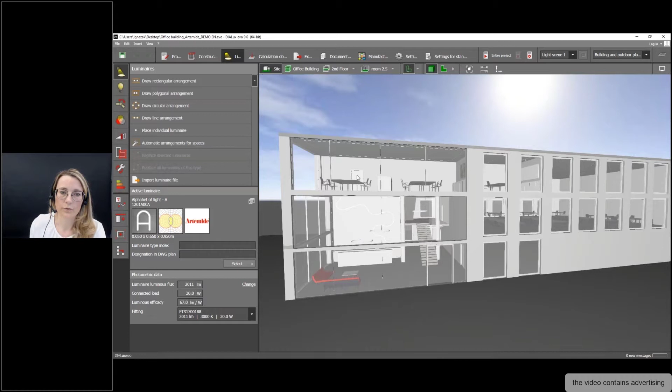Okay good, let's go forward. I will introduce you to the project. Here we have an office building, and I will go to the second story in this part with the office. The foyer is also created here with some luminaires from Artemide that I'll show you a little later. I will go first into this office, since we need some luminaires here, I will show it in that case.

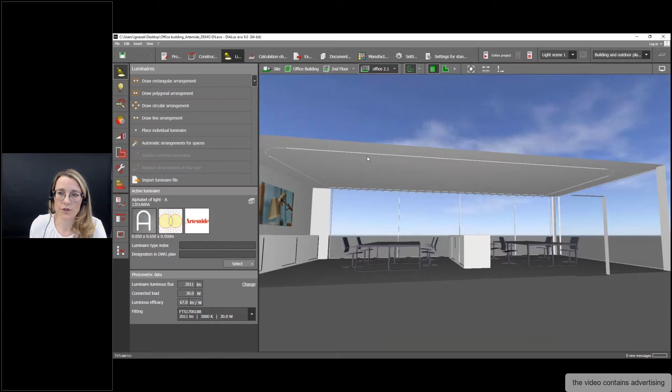I have prepared this room with the track system, from Artemide's A.24 system. You can use it recessed, surface mounted, or pendant. I have decided here to work with the recessed version, and in the corner I used this profile as well. I can also add this light distribution curve to highlight the corners of the room. I think it's very interesting, and another special solution here is that we don't have the rectangle form. The other parts of this track are built from objects, because I have the recessed version.

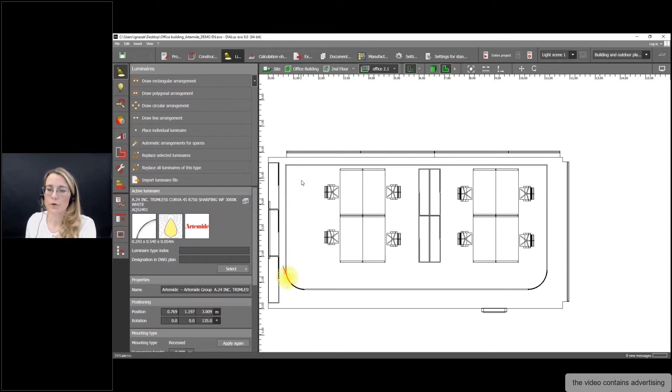For the planning, so that I can import the line arrangement, I should use the import function. I will go directly to the homepage from Artemide. You can search here on the right, but I like to go down to architectural indoor and search for the product directly. We have the different pictures and the A.24 system, so you see here the different solutions.

The magnetic track also uses spots for flexible positioning. Then we have the diffused option and the sharping, so direct lighting, also some standalone versions. I want to have the diffused optic, so I click on that.

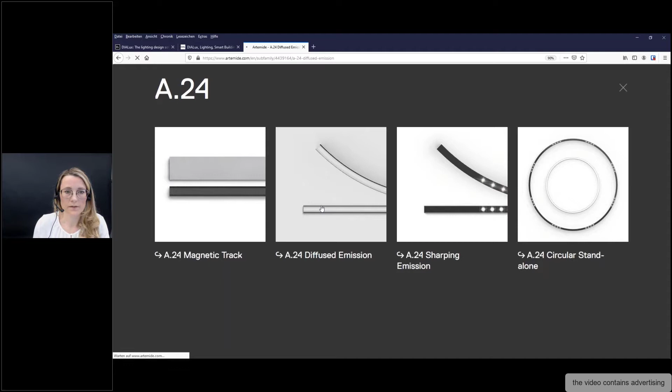It needs a second. So yeah, here it is. You can see here also an example of line arrangement. In this big office, I go down.

I want to have a white system, white color, recessed. And I need the length of 1.17 meters because that is perfect for my office, in the correlated color temperature of 3000 Kelvin. Then I get here my product, so I have only one.

You can, if you like, download the data sheet. You can get a zip file with all information about the products, or mark it as a favorite. When you are registered, you can have a list there. I click on the code, get more information to check it in, and then we can go here to the ULD file.

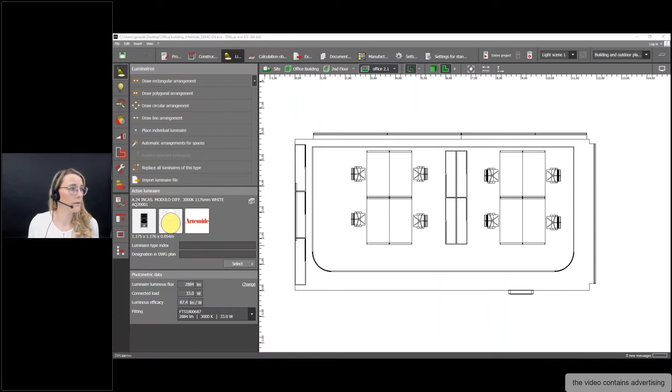That's perfect to use an ULD file because it's more representative. So I go to open, and then it should be in my project. I will move it to the other side. So you find here the active luminaire.

That's my import. I have this length of 1.17 meters, which you find also here down under the picture. And to go forward, I would like to use the new line arrangement.

So when I click on line arrangement, you see that the mouse is active, and you have a little line here next to the arrow. When I go here to the left, down under this active window, you find more information about the arrangements.

The first part is the possibility to use the line arrangement according to the quantity, and the other one is according to distance. In my case, I want to have here over the tables and over the shelf a line arrangement.

I don't know how many luminaires I need here between these tracks, so I use in the first step the according to the distance option. Then you find the information that you can write in a distance per meter, or that's new here, per luminaire length. When I have the mouse over, you get the luminaire length of 1.17 meters.

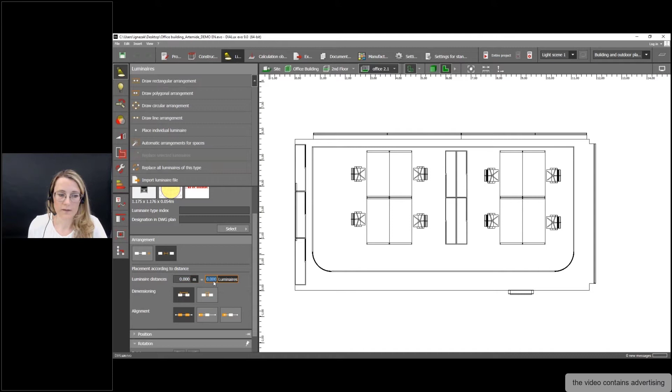At the moment I have zero luminaire length, but I can type in, for example, 1, and you see on the left side automatically the 1.17 meters of this length distance. Or you can say 1.5, and it's automatically calculated by DIALux evo.

I want to have 0 luminaire distance, and then it is interesting how it should be measured here, from the middle to the middle point of the luminaire, or edge to edge. In my case, I want to have here the dimensioning edge to edge.

And now you see we have minus, so I have to write in once again 0. And we have also the different alignments, so you can use the mouse over to see it centered in the line.

The first object should start with the start point or the central point here. So the center of the first luminaire should be here on the start point. In my case, I often use the second one, for the edge here on the start point.

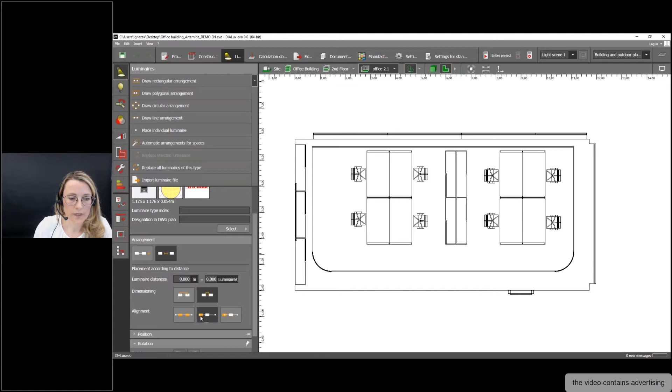Then I can go in my project and create the first point, the start point. You see also what is new, that when the line is like an arrow, you have a start point and at the end point an arrow, so you see the direction where you are going. You can move the line and get a preview of the pieces, or the quantity of the luminaires.

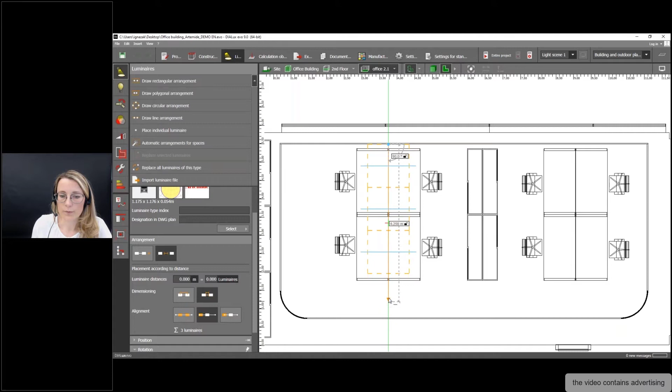This orange line is a surrounding of the light distribution curve, called the bounding box. You see in that case, when I draw this line, I get 4 luminaires, and when it is a little bit shorter, only 3. So you see here the preview.

Then I can click the second point, the end point, and the line is fixed. Automatically the line becomes active, and that's also new. You find it here on the right: Edit line. This function was given before, but it is now automatically active, and I don't have to click on move to move the line.

So I can go directly here on the line. You find my axis, and then I can move my line to the best position directly. Click to the right, then it is marked, and when I click once again, it is automatically in the function for moving the line.

You can also click the end or start point to move the line or make it longer, something like that. You find also the measure dimension line here, the length of the line, and at the moment it is 4.73 meters. It's also here the information for you in this part.

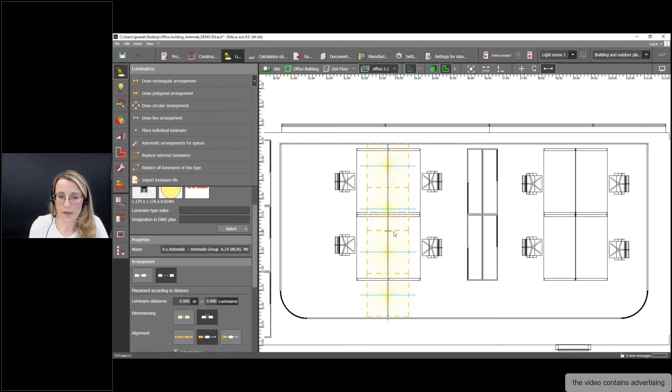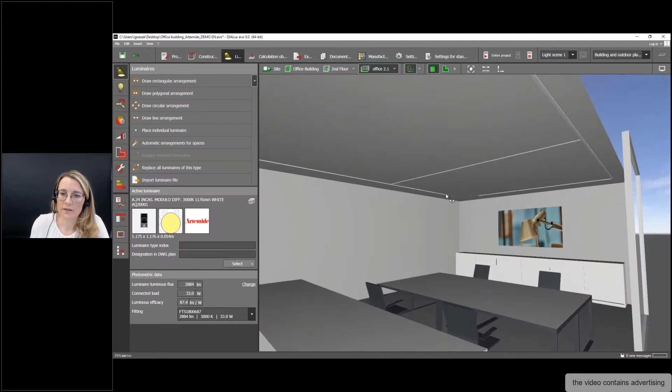Also interesting is the 3D view. I tell my participants in the seminars that they should have a look at the ceiling here in the 3D view. Is the line or the luminaire really recessed in the ceiling? Sometimes it can be that it's not perfectly placed, but here in that case it's okay.

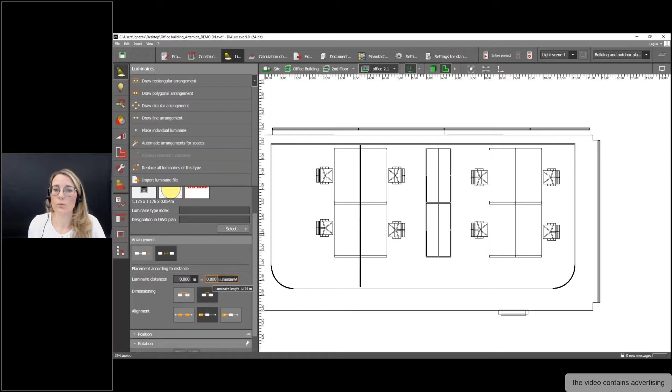We can see that perfectly, so we can use the second line. So when I go once again on draw line arrangement, you see that DIALux evo used the last case. So you can directly go forward and draw more lines. You don't have to copy. You can if you like the copy function, but in the other part, you can only use the line arrangement. So once, and the second one here, I can draw the line arrangement.

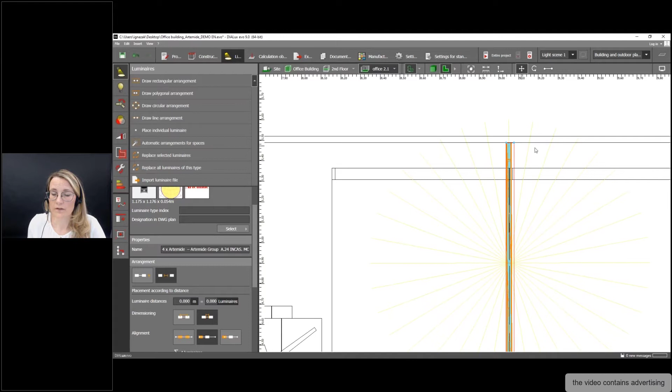When I go on move here, because I want to have the edge points here, I can use the shift key, or I can use the shift key to deactivate the snap function. So you can really move it really detailed, I will say like that. And then it is perfectly placed here.

So in this part, I have 3 line arrangements, and it's perfect here that we can use the diffused optic. Okay, so let me check the first part. It is okay. Yeah, it is good.

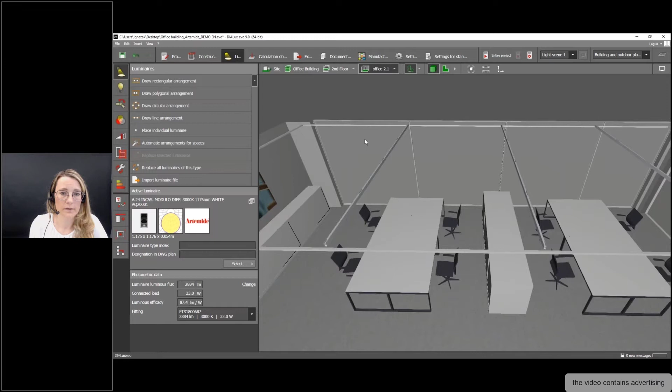So before I will go forward with the other part, I want to show you also the arrangement according to quantity. I want to have a second survey.

So it's for me very interesting to know, did you already try out the new version, DIALux evo 9? So please answer. So we have 73% for yes and 27% not yet.

So what's the reason there for the 27%? Maybe after this webinar you will use it. Please try it out. I think you can use the new functions very, very easily here.

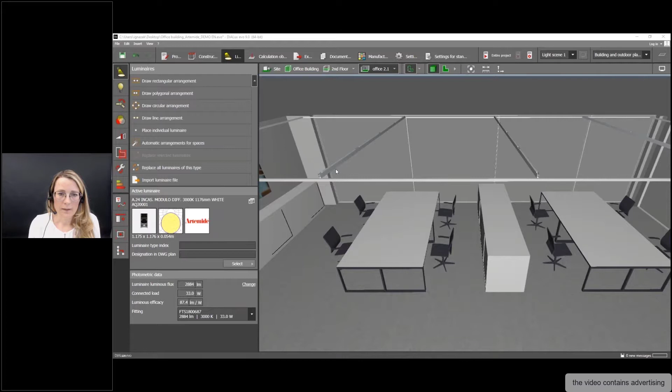Okay. In the next step, I will show you the quantities, the solution about the quantity. So I use also one luminaire here from Artemide, and I want to have the spot. So I can also use the search function for the vector spot. You can write in the name.

And yeah, here you find also different types. I need here the vector magnetic, because this is a spot you can use also for the A.24 system. You see it here in the example of this project, this picture.

And yeah, also I want to have white. I want to have a beam round about 20 degrees and also 3000 Kelvin. So we have here this new one, article number, and yeah, here also LDT PDF or LDT this luminaire file, but I prefer the ULD to have also a perfect 3D model.

So then send it to DIALux, and yeah, here is the spot. You find the information here, and yeah, when I now draw the line arrangement, I want to have a spotlight here on the table and the shelves. So here on this side, in the front of the windows.

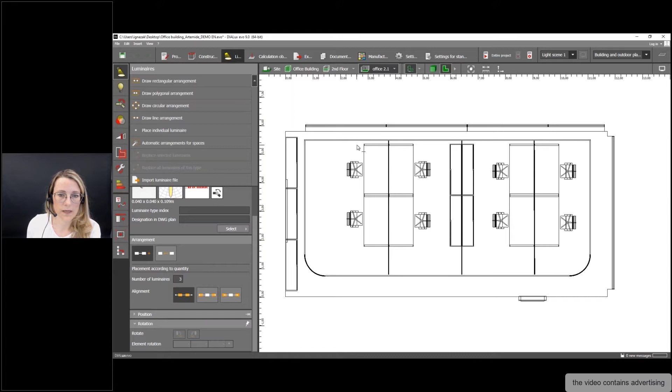So I can use here the corner of the table for the first part. You can move here the line around, and then you get the green help lines. That's very good here to use. And then I have here my line arrangement.

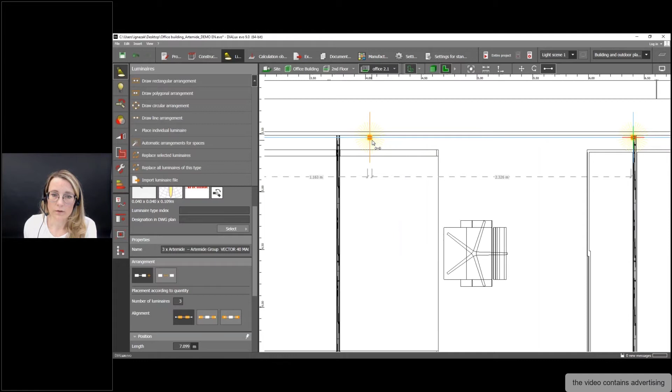So you see we have also a preview. It's now a little smaller spot, so you will find here also this information. And yeah, before I have used the other line, I didn't give you the information of what is also given here on the line. So I think I should do this once again.

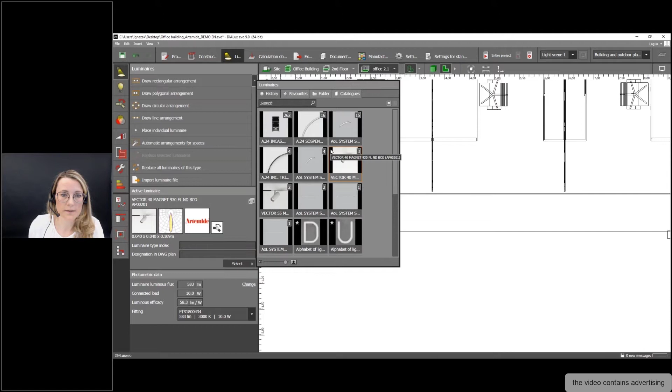So I draw the line arrangement first here in this part, once again with the other luminaire. Let me see here. I click on this one. Once again, it's easier. So draw this line arrangement once again. So now you see we have the preview.

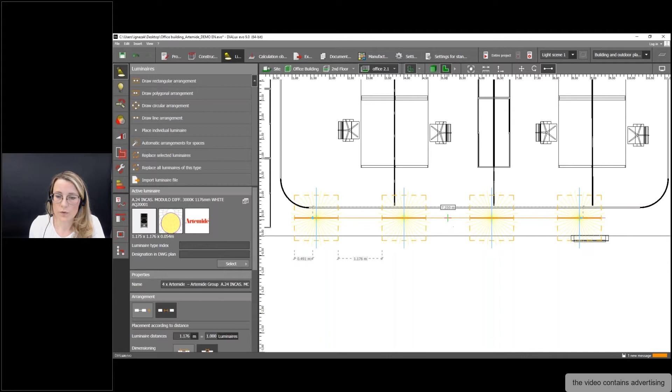I will click here on this part or move the line once with the other distance, because you have here also information about the center point of the line. So we have here the axis in green and red. So you have here also the center point.

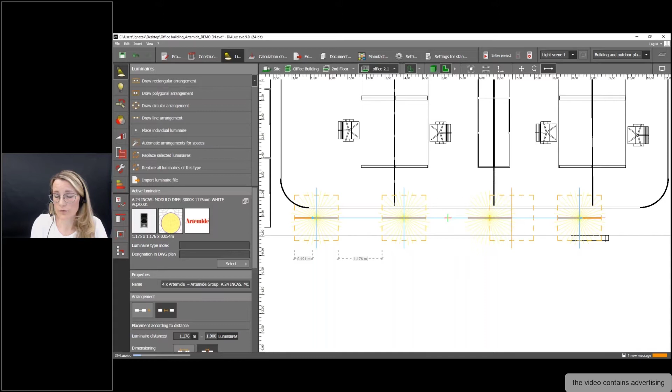That is very important. And you have blue axis here, and you can click on them too to move luminaires only here on this axis of this line. So maybe there's a room element that you can place it here, then you can move it some centimeters to the right or left.

Or when you want to delete a luminaire, you have to click here only on the luminaire. So you have to zoom in to move only one. And then you can also delete this luminaire here on the line if you like.

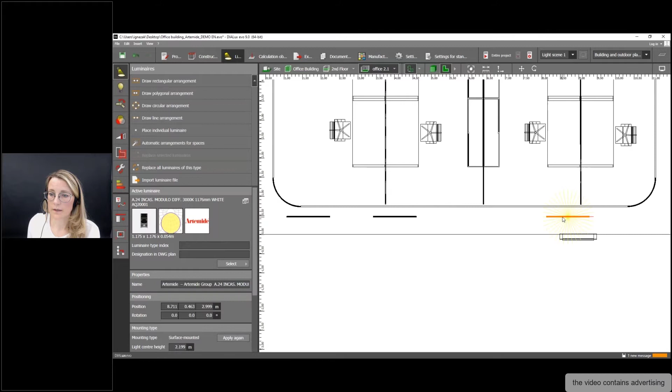So one click, you have all, and the next click you can also move only one luminaire. You get also the information there.

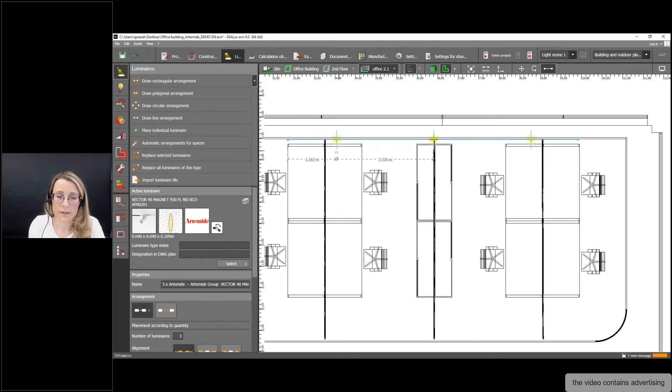When I go back to my line arrangement from the spots, you see also here the axis, and I can move the spots if I like, but they're perfectly placed for me here. There's also only this in the middle.

I want to move it a little bit to the right, directly without clicking on the mode at the top. It should be in the middle of the track I prepared before. Let me check the mounting height.

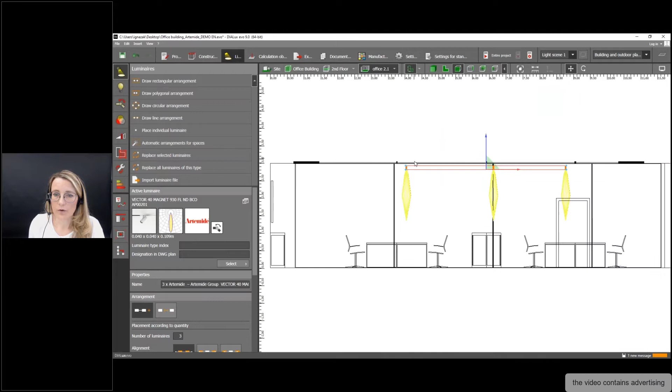You see it is a little bit suspended, down under the ceiling, so I move it up. Please check the mounting height each time.

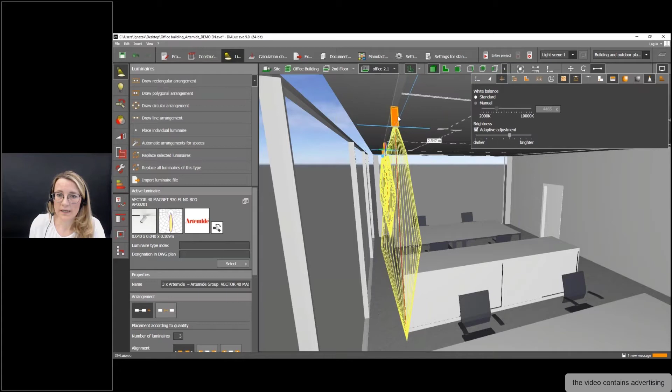When you're using the display options, the second tool from the right, show light visualization, then you can click on only one luminaire and you see automatically the light distribution, the light visualization, without calculating.

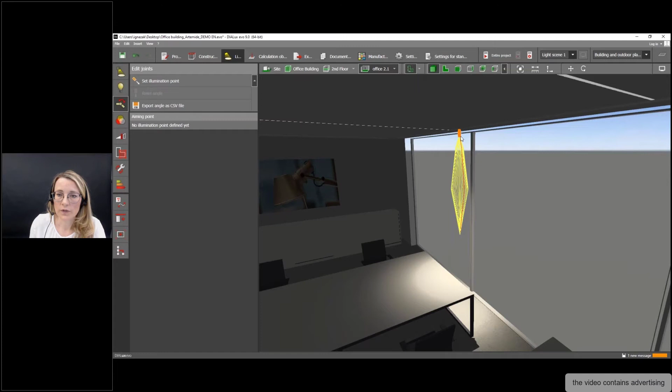The spot has also this function for the joints, the same as before. When you click on Edit joints, you can click once again on the spot or the luminaire, and move this rotation. So you get the best angle in the preview.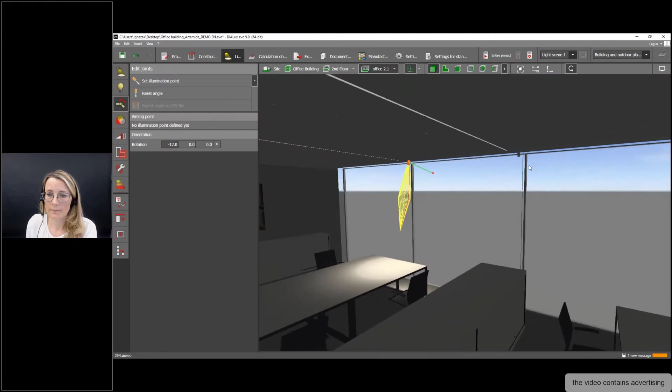Let me check like this. On the left, I can write in, for example, minus 12. So it's only one luminaire. I click on the next one, write in minus 12, and also the last one in this part.

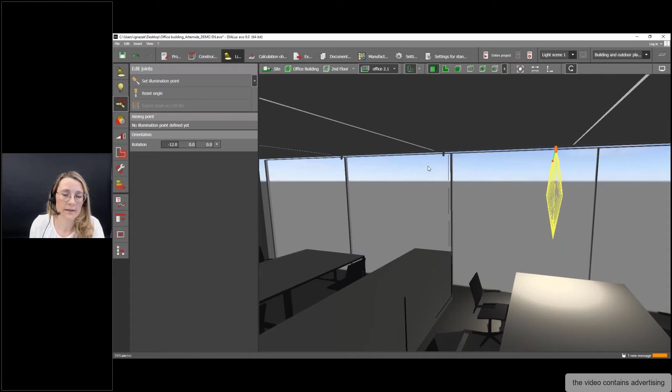Here's also a tip: first place only one spot on the line, then you can adjust the rotation angle, and then increase the number of luminaires on the line - all luminaires will have the same angle. It's more efficient for your planning.

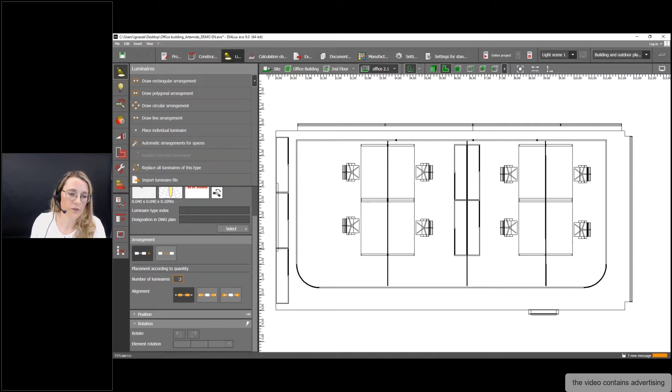That is the positioning of quantity. When I say once again, draw line arrangement, you'll see that DIALux evo has used the positionings or details of the positioning from before. The number of quantity was 3.

I will use 5 in the next part. When I click and draw a line, you see I have automatically a preview of 5 luminaires on the line. I can make it shorter, maybe 3 meters.

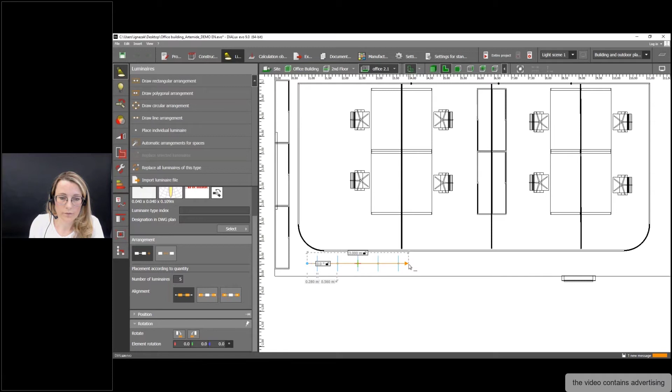You see then the distance of the luminaires is next to 56 centimeters, or I use the whole length of the room, and you see I can also use a distance of 2.5 meters. You have it given with the dimension lines automatically - very helpful for you.

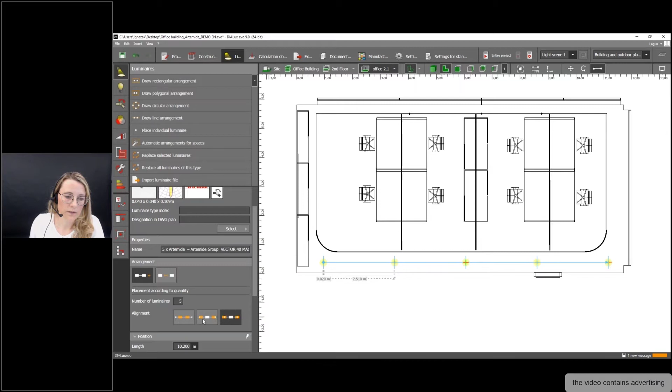Try out the different alignments if you want. Maybe it should start with the start and end point. With the spots, it's not so necessary to define this part because it's a short or small dimension of the luminaire.

So I delete this part. I have used the different types - let me see if I've forgotten some information. No, it's okay. So one hint for the track.

When you're using it as a pendant solution, it's very interesting that you can get this track system also with an indirect light distribution. So you have your magnetic track for the spots in the room, and an indirect light for the illumination of the ceiling. I think that's also very good to know.

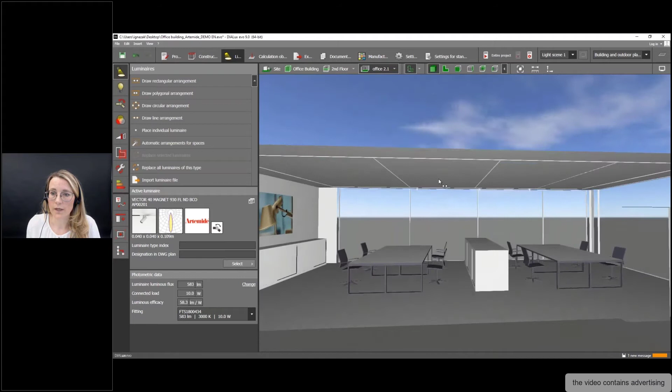Please have a look at the different possibilities here - you can use it on walls and ceilings, you can have corners and also curves. So create your own elements in your room. I think that's very good.

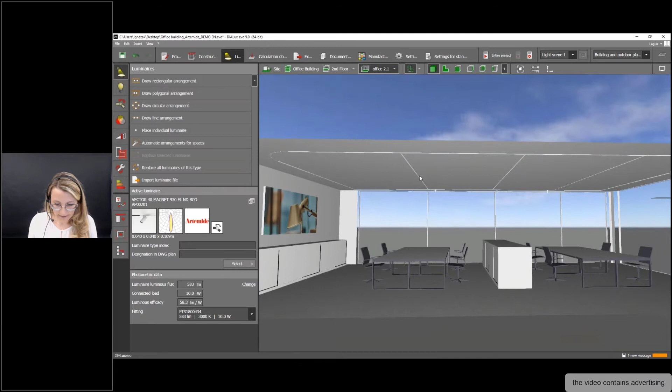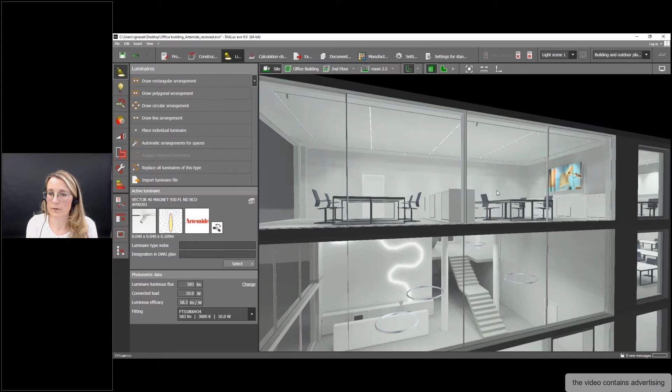And in the foyer we used the alphabet of light. I think that's also very representative for the big foyer. So it is very exciting here.

For that, I want to give you the information that you can use also the plugin from Artemide. So when you open it, I will show you what I have used. When I go to my favorites, you see that I have saved my favorites here for the word DIALux - you can have the different letters from the alphabet.

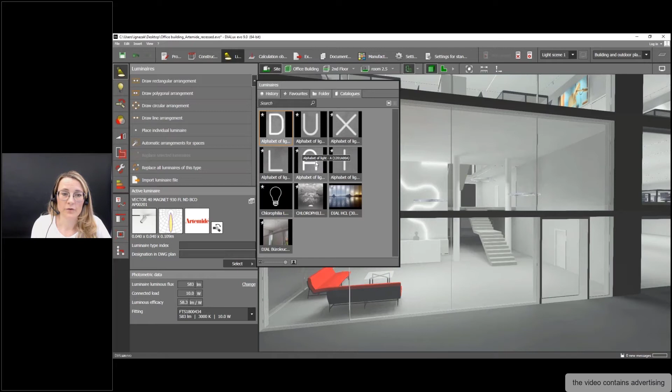So here is opened, you get another window for the plugin catalog. You can go to search by name, and I will write 'alphabet of light', so alphabet, and you get here the whole alphabet in the different letters, so you can use them as an own luminaire for creating words, for example. And you have also here the numbers, so you can use them also.

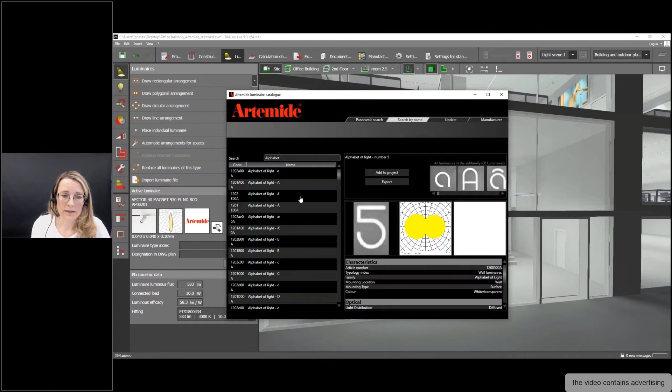I think that's very cool, and that's easy to use here with a plugin. You have also straight and curve elements, so please try it out like me here on the reception desk, here at the wall.

Yeah, and then I want to go to the documentation and show you the line arrangement. But before I do that, I will go and have another survey. I will start it because I think that's interesting for our colleagues from Artemide.

So, which of these following products do you know or have you used already? So please answer, I will also show you the result.

Perfect. Yeah, so I will show you the documentation part. Please, use also the advantage that you can here implement or import the different visualizations here for the project cover, for example, also.

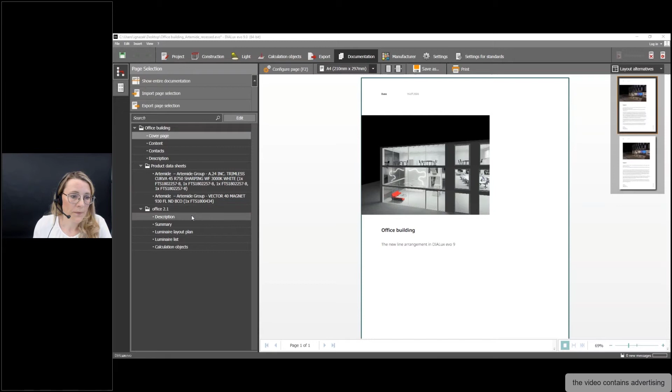And when I go to our room for the Office 2.1, you see also here you can have different descriptions. I think it's also good for the client, to show or to explain what your concept is there.

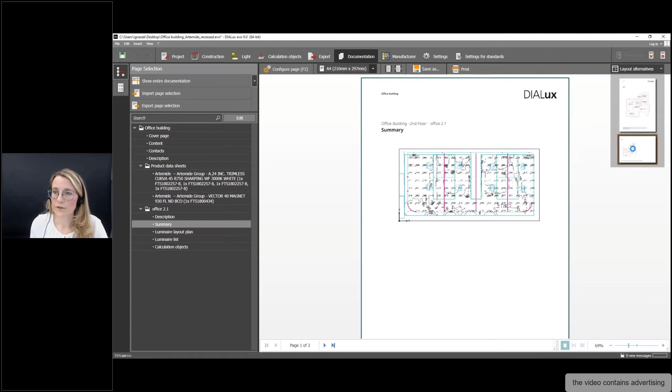And then we have the summary. I will show that also because in this part you can use the other format. Here we have the possibility to use different layouts.

You can hide also the values if you like, so that you have only the ISO lines, but you see here also the luminaires and the furniture. So I think that's very good for you to know, that you can use the other format so your room is more, or better to see here in detail.

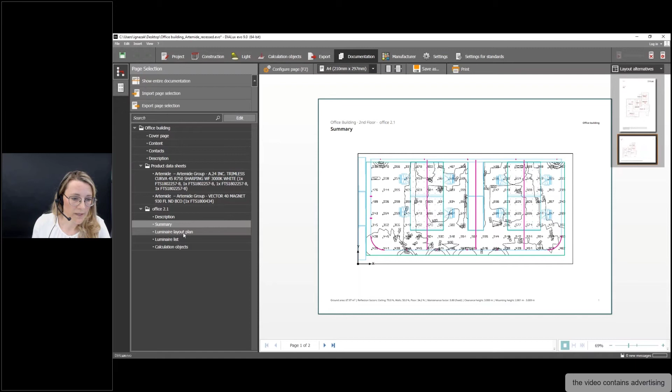Yeah, and then I want to have the luminaire layout plan. That's very good because there you find also the information about the line arrangements.

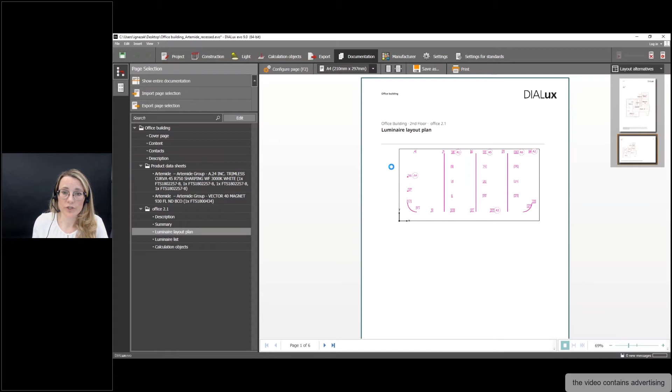At the moment, it is very empty. I think that's not the best case for the presentation. If you like, you can also show the DWG file or your image file, which you have imported in the background. In my case, I have no file, so I can't show it, but I can use here that I want to see the furniture.

So that I have used here from DIALux evo, so that's very good here. And yeah, here it is, you see now you can better see the different arrangements. And the arrangement has here the symbol of the circle. So A1 to A5, for example, that's the different arrangements.

Don't have a look on the different numbers here because I have tried out to find the best solution in this case, and then I have deleted and placed new luminaires, so the numbers are not in the perfect order. But when you do this like me before in the other project, then you have the perfect order here.

Yeah, and in the next part you get the information. You find here the information about the luminaire. In the best case, also the article number and more information, also the length, color temperature. And then you get here information about the arrangement.

For example, arrangement A1, you have an index for the luminaire. So 1, 2, 3, and 18, they are here in the arrangement of A1. And you see the information what you are using, so outer edge to outer edge with a distance of 0 meter and four luminaires on this line. I think that's very interesting here to see.

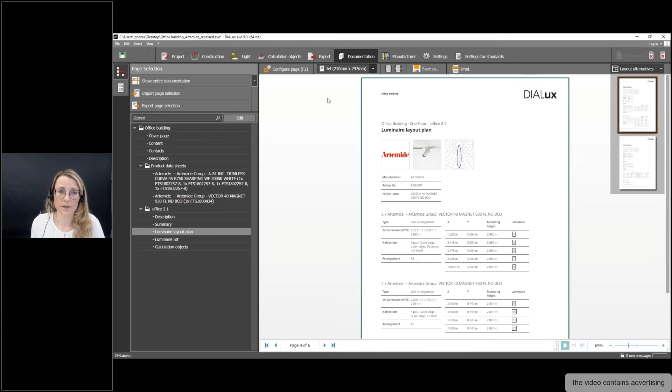It is here written, it is arrangement A2, and we have here the index to the luminaires. So you can give this information also to your customer. I think that's very good to know that you have here the best understanding.

If you like, you can also use dimension lines and implement it in your part. You can activate this checkbox that you can also see some dimension lines here if you want. So please try it out, and then you can save it later as a PDF if you want.

Yeah, perfect. So that's the part here in DIALux evo. I want to ask you if there are any questions which are not clear. You can write your questions now. Let me check the question box.

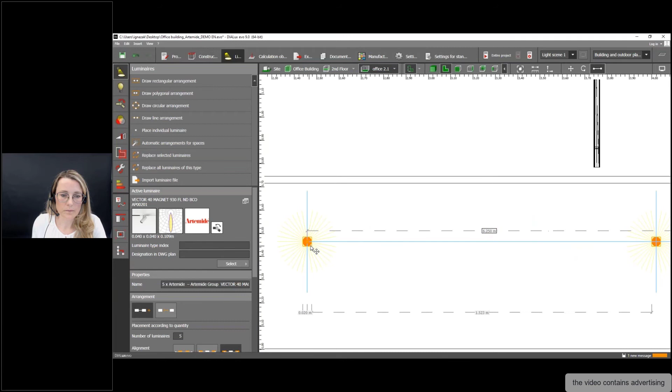Here's a question: can you rotate the luminaire at the same time as arranging it? Yeah, you can. My tip is that you only use one luminaire, write in the rotation, and then make the number of luminaires higher. Or you can draw a rectangle here to activate different luminaires, or use the shift key for the rotation in the luminaires part. First here, then here and here, and you also have information about the rotation in this part. You can try it out here.

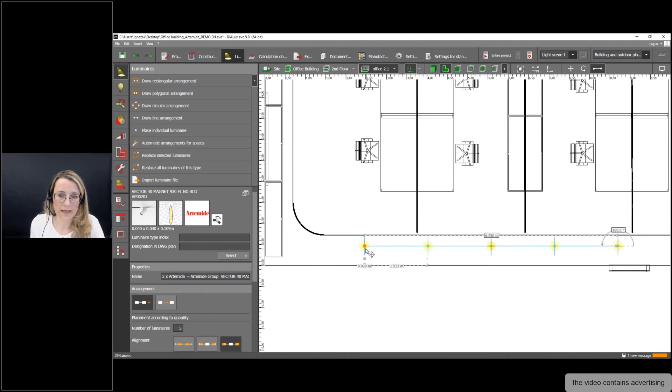Also interesting, I think, when you have the line arrangement - it's clearer here on this part - you can also use the rotation for 90 degrees. You see directly the luminaire is rotated at the angle of 90 degrees. That's also very cool, I think.

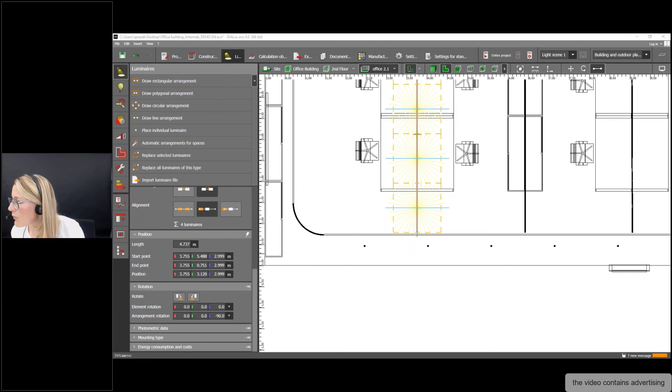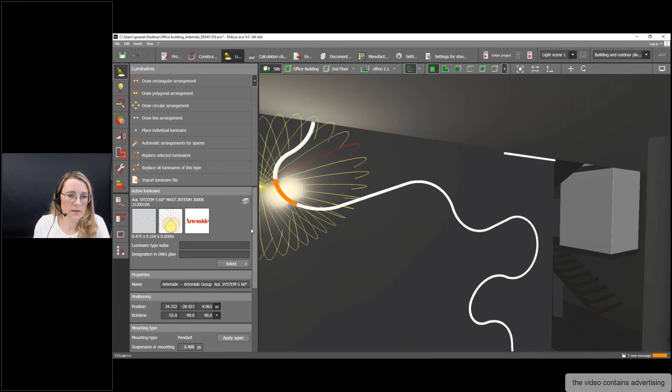Yes, it was not so easy for me to create this shape in the foyer. This is really used here. I have used different types from the Alphabet of Light, so you see the system here. I tried it out and created this individual form. I liked it very much, and I also liked having one line in the corner - I think it's very good to highlight this corner.

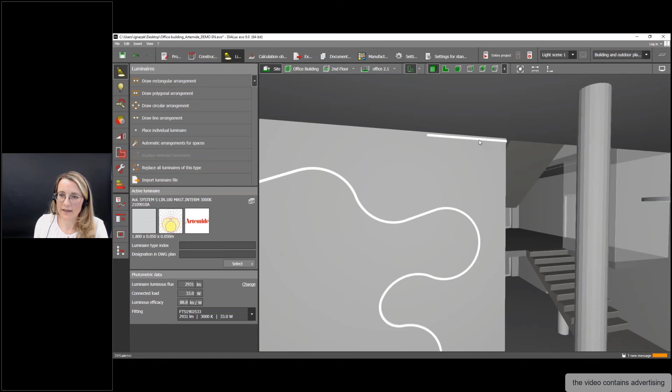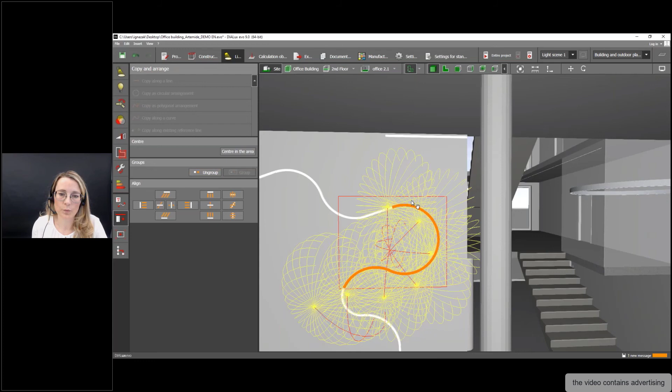I like this way, and I created it with different parts. You see here this is also made of different parts. I have built a group - under copy and arrange, you can group some luminaires, because when you're moving to find the best position, you can build a group of different luminaires. In this part, this is one group, and then I used the different parts.

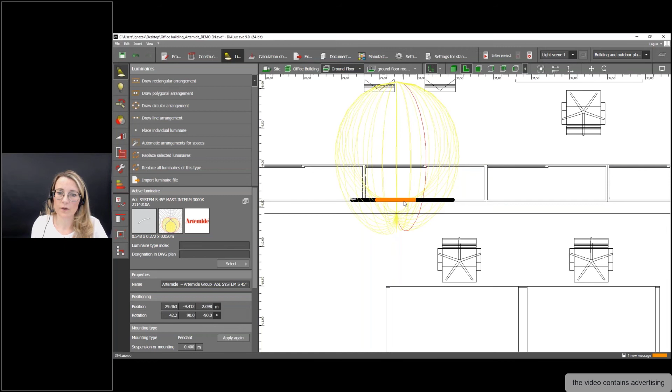It's very important to check it in the 2D view. It is very well placed here on the right axis, perfectly on the wall. Then you can create it, and I think it's very good here. You can go next to here - you see it's not perfectly blended, it needs a little bit of time.

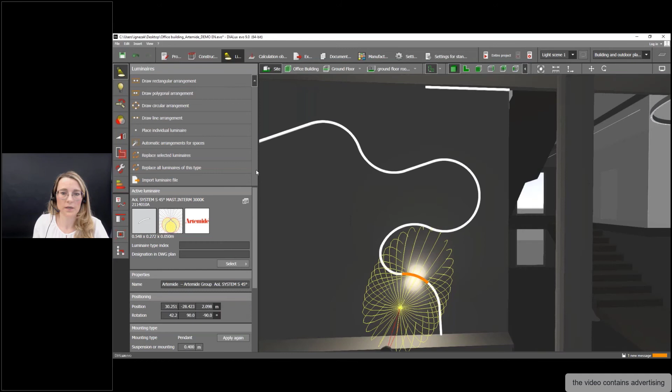But then you can create different luminaire arrangements and be very creative - I like it very much. When it is calculated in the other part, when I go back, you see it. And when you have a rendering on export, you also get the mirror effect of the windows. I like it very much.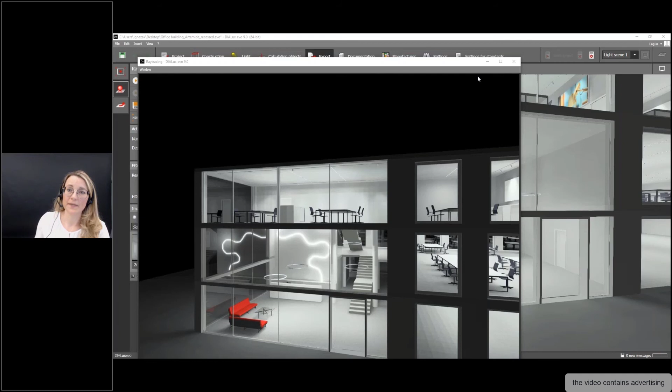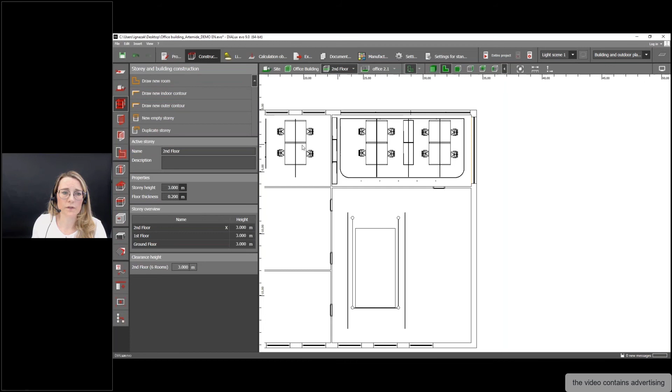Okay, let me think. It looks like the track was ready before inserting luminaires - could you explain how you put the track on the ceiling? Because for this webinar I prepared the project before, and I tried out the best lighting design for the office. I found out I wanted 3 arrangements, so I knew the distances for the track. When it's not a track from Artemide with indirect lighting for pendant, I just used a cube, creating a cube in the length - a small cube. You can scale the cube in this format, and then you have the different parts.

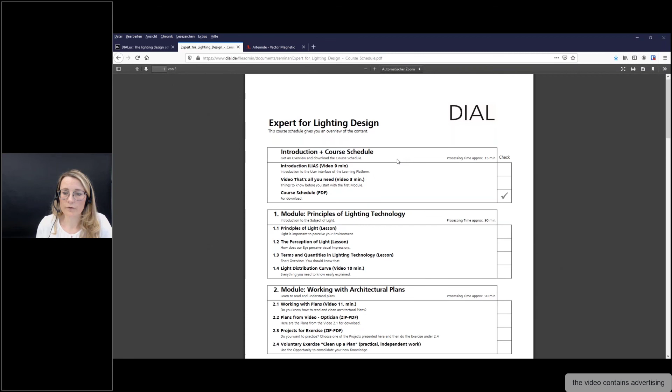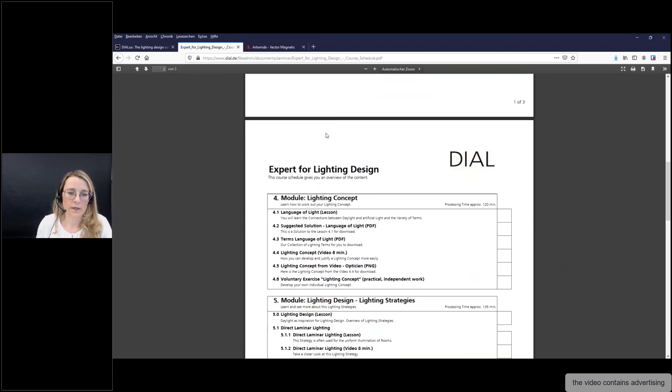When you are interested, I can show you this on our homepage. So when you go to training, all trainings, lighting, you find information: the presence days, the 5 days, some webinars for DIALux evo, and here the online course Expert for Lighting Design. If you are more interested, please open the course schedule as a PDF. We have the whole content there, you find the timetable, and you can go forward from module 1 to the last module, where you will learn the strategies to create a good lighting design. I think it's a very attractive and good course, and I'm sure you will have fun with it. It would be nice if you are interested in this course.

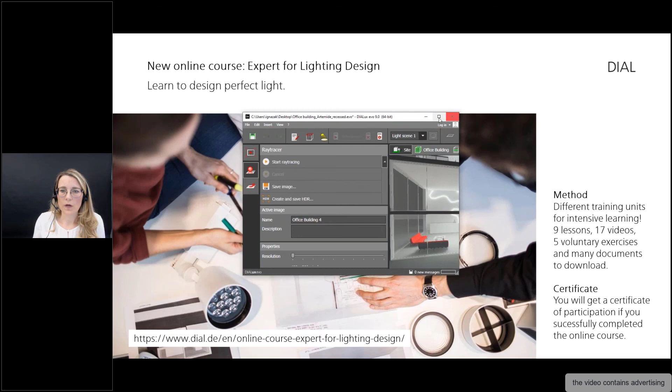Here's also a question about the documentation in the room: when you are on the description page, can you configure the page and edit the title? Let me check it once again. I think it will be clearer when we have the 9.1 program version, because then it's clearer. So when you are using the description page, you can't rename the title here, the description from DIALux.

When you are importing or inserting more than one picture, let me check once again. I'll click on add. When you have more than one, you automatically get more pages. The first one is the description, and the other ones are then possible for the images, and then you have different layouts available.

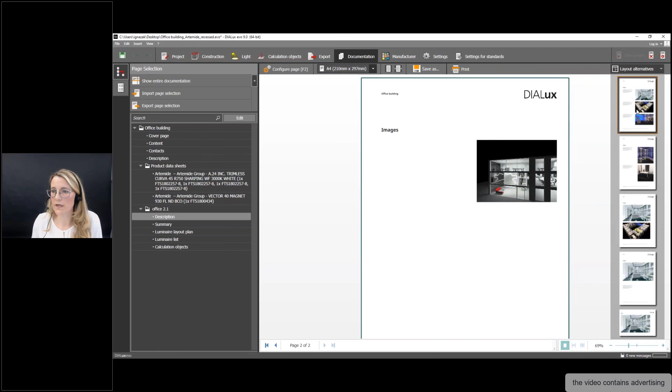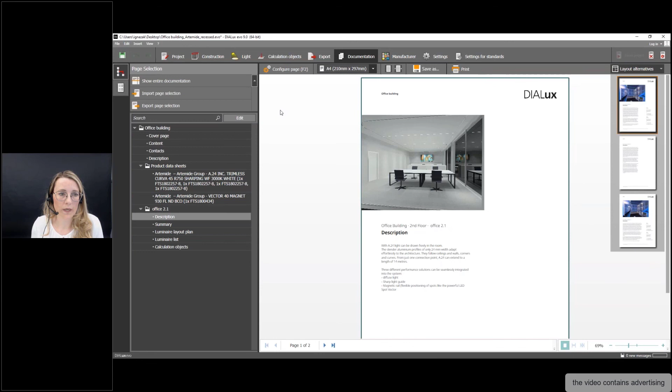So when you are on the description, you need to know where you can write this text. Maybe that's a problem here. I'm on Office 2.1, and for that I have to go to construction and activate, under spaces, my room, and here you have the place for the description. But we will give you a link later, in the next versions, so that you also find in the documentation part the possibility for the text. I think that's interesting to know at the moment.